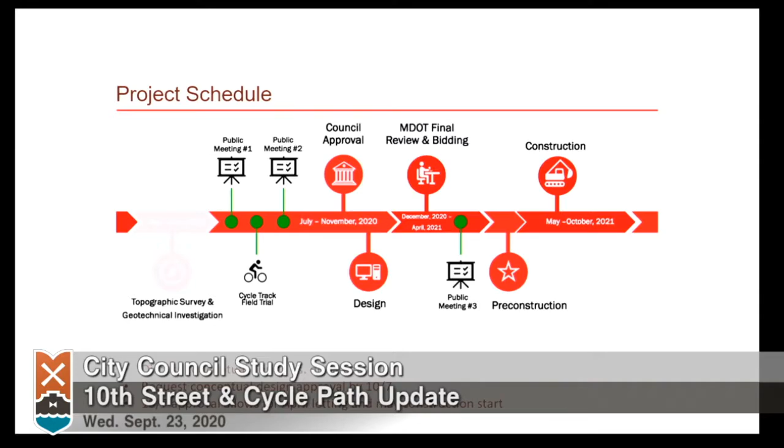So the timeline is basically self-explanatory, but one of the big things we are faced with is that there's some funding on this project, federal funding through MDOT, and the time it takes to get through the review process and the bidding process with MDOT is several months long. That's why we find ourselves here, not quite to the fall, or just getting into the fall, the year prior to construction, really having to set a date out there to try and at least get what I'll call the conceptual design done.

There's a difference between conceptual design and detailed design. So basically, if we can address the conceptual design—that's more the 50,000 foot view, what kind of elements do we want to have in the project—then what we can do over the course of the next several weeks is move ahead with the detailed design that basically puts all the nuts and bolts on that, gets all the pay items.

There's probably going to be 300 some odd pay items with various quantities. So again, we want to, by October 7, get that conceptual design down so that we can move ahead with the detailed design, go ahead and bid that out over the course of the winter, have a bid opening in April, and then still be on schedule for construction in May, after tulip time, after Hope College gets out of their classes in the spring.

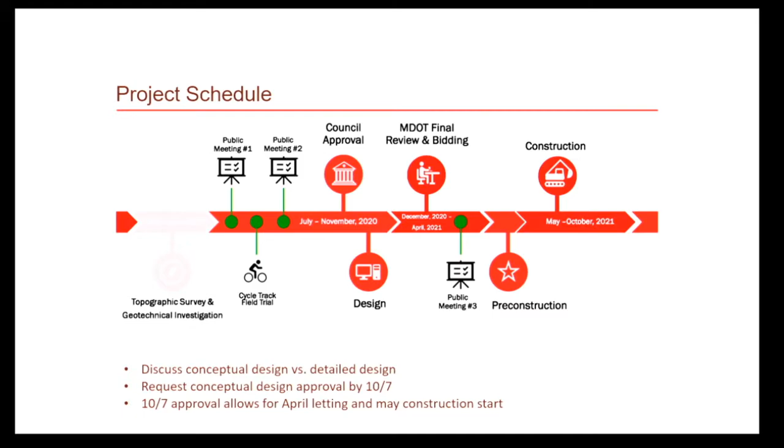So the next slide here just talks about the project limits. Again, it's primarily 10th Street from Van Raalte to Lincoln, a little under 2 miles. The pieces on College Avenue and Columbia Avenue are important, but somewhat ancillary to the overall project. With the construction we've done in the past, it just kind of links everything up nice and together, so we did want to include a couple of those stubs on the side streets to make that happen.

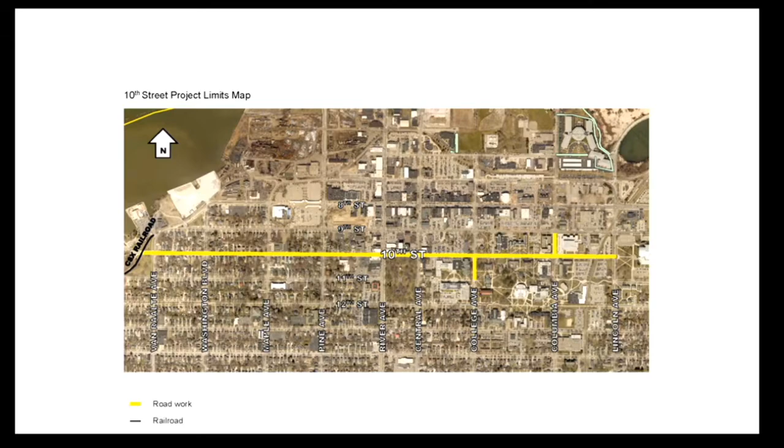So now just going through the design elements here, and this is typical of most reconstruct projects. We're talking about utilities, sanitary sewer. There's some elements of sanitary sewer that are fairly new and in pretty good shape, primarily at the west end, so that west end construction will probably go a little quicker since we don't have that deep utility to replace. But there is some sanitary sewer work, particularly on the east end.

We've talked with the BPW more recently about water main, and they are interested in doing pretty much the whole stretch of water main. There's a few pieces and parts, but looking at the age of the water main and things like that, I think that's kind of brought that up to the surface a little more. So that's certainly the plan at this point to move forward with. And then water services, obviously, that has to do with the lead copper rules and things like that. We don't necessarily need to get into that, but basically we're going to update those services accordingly.

And then storm sewer as well. Again, we don't have any big main storm sewer on this project, but this is basically taking what's probably 100-year-old storm sewer throughout most of it and just upgrading that—smaller diameter stuff, but still important to do. The pavement, certainly looking at new pavement, new curb and gutters. We want to retain the element of on-street parking, certainly upgrade pedestrian facilities where appropriate, and certainly take a good hard look at bike facilities. There's options there that we'll talk about further. Trees, street trees—we'll talk about those more in detail as well, but that's an important aspect of the project.

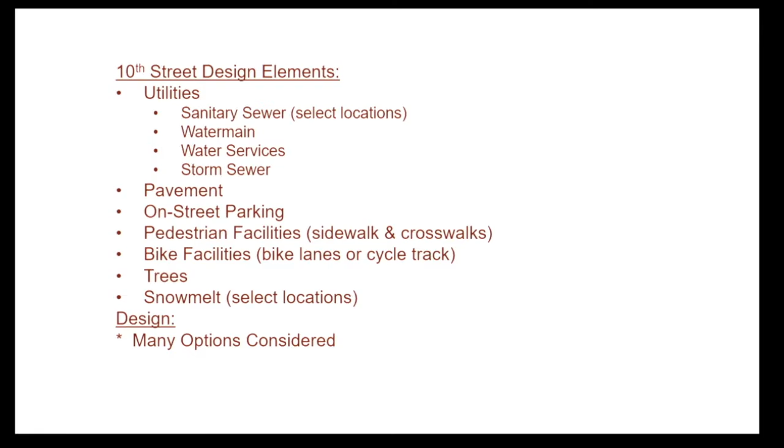And then snow melt. I do have a slide here on snow melt that I'll share with you. Again, snow melt, I think we're going to be working on that probably through October, but we've got at least a baseline for snow melt that we'd like to start out with. So in essence, we've got many different design options that we've considered, including various degrees of those pieces and parts.

Getting back to the snow melt, basically at this point—I appreciate the slide doesn't do much in terms of showing where we're at, but I'll describe it. That circle there is basically 10th Street between River and Central, so Centennial Park is to the south there, and that's basically our baseline for snow melt. When we talk about that, we're really not talking about snow melting the road as much as we're talking about snow melting the sidewalks there. There are some elements that are already snow melted, so we're going to be linking that all up together. That's the baseline snow melt at this point.

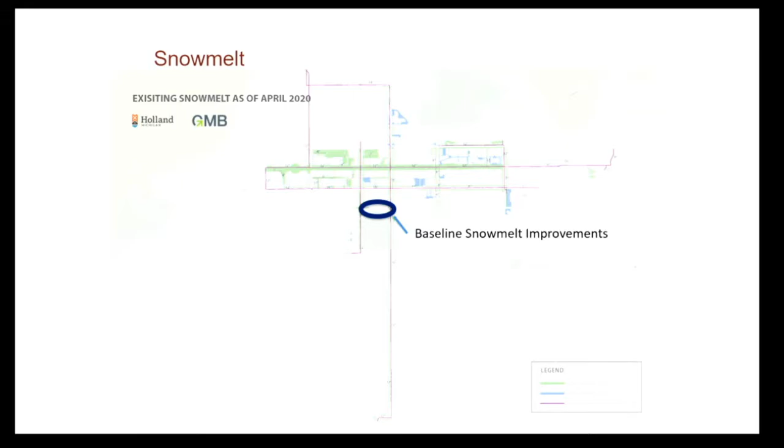Okay, so some project background, and again, all this kind of funnels into our recommendation at the end. But basically, why are we doing 10th Street? Well, 10th Street's on our capital project list, it has been for several years. There's some MDOT requirements, and we've talked with MDOT on a few different occasions about what we can and can't do on the project, so that's good ingredients to have in the mix.

We've got Hope College representation on the design team, which is great—definitely want to put a plug out to Hope. We did that with 9th Street and some other projects that involve Hope College, and it's just great to have them as part of the team. So we do expect some input from them before the meeting on October 7, and we'll share that with everyone.

There's certainly elements, particularly when we start talking about non-motorized, to the city energy plan and goals. We've got a downtown traffic study that was recently completed that identified some non-motorized recommendations along 10th. We have a bike and pedestrian plan that's a little older, probably pushing 10 years now, that also recommended non-motorized on 10th Street. And then we have just connectivity.

This gets to what an east-west corridor would look like, and what it could potentially connect up. So there's a map here I want to show you, but you start talking about all the different things that can get connected.

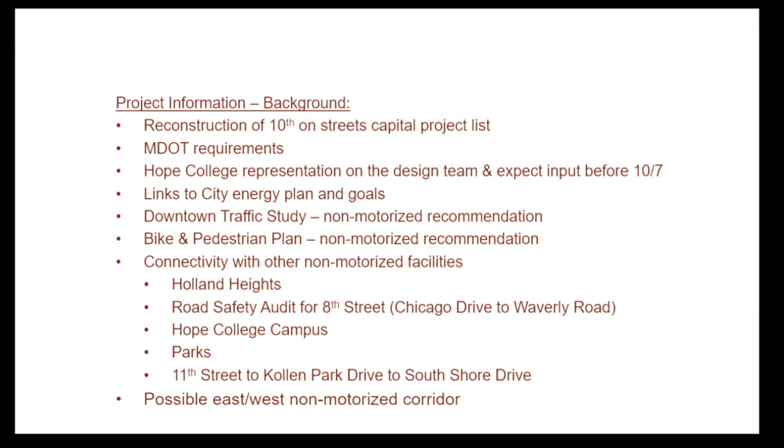Sorry to interrupt, but I'm just going to jump in because I think a lot of people forget that, and I want to make it crystal clear: the 8th Street section from Chicago Drive to Waverly Road is not in the city. That's referred to as the federal district, and that's in Holland Township. You said it, but I really wanted to make a very clear point of that.

And then our project gets you over to Lincoln Avenue, and again, as we talked about through that federal district between Chicago Drive and Waverly, there's certainly a possibility or potential for some non-motorized there too. So you can see how that starts connecting up, and that's why we're looking at 10th Street and giving it a good look for non-motorized, and that's why it popped up on all those studies too.

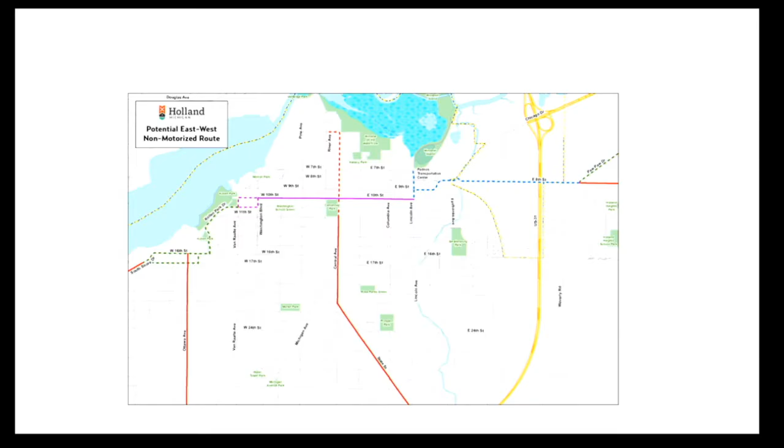Okay, again, some background information for the project. You all recall PASER ratings, 1 to 10, 10 being a great brand new street, 1 being really bad. We're in the poor category for 10th Street primarily overall, so it's due.

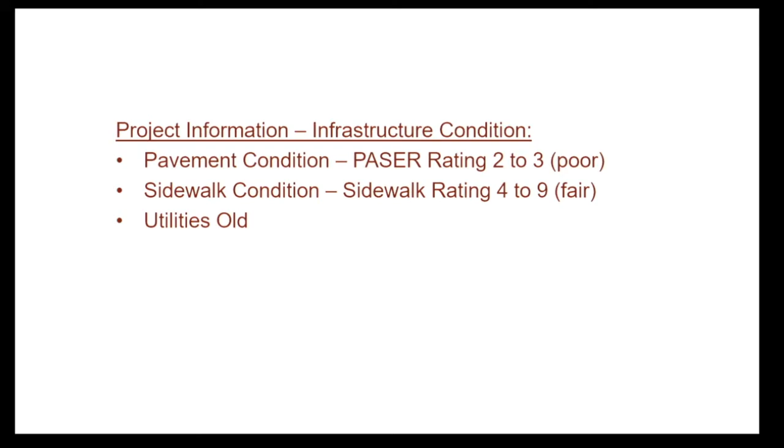Sidewalk condition, I love to give this plug because we just got done with sidewalk rating. I'd say we're in fair condition depending on where we're at. We do have some nice areas of sidewalk, but there are some that aren't in the best shape. So obviously that's part of the detailed design where we'll go in and make sure we get everything in good shape sidewalk-wise.

And then as I mentioned before, with the storm sewer and some of those other utilities, they're just old—we're talking 100+ years here. It's a great opportunity, again, with the funding and things like that, just to look at everything.

Speaking of the funding, we did get an award for 1.2 million in STP, Surface Transportation Funds, through a federal grant. That was through the MAC, the MACATAWA Area Coordinating Council, that's our local MPO. The question has come up in the past, and I want to address it right here: the non-motorized element isn't necessarily required to secure or maintain that funding. So we could move ahead with the project without any non-motorized and not be in jeopardy of losing that grant funding. We did clear that with the MAC, with the MPO, and that was the response.

I will say that part of our grant application included the notion that we would put some sort of non-motorized improvements in there. That gave more weighting to our application, and I think it made it more competitive amongst our peers in the local metropolitan planning organization. So to proceed without any non-motorized improvement, I think we lose some credibility, maybe some street credit amongst our peers if we don't move forward with that element in some shape or form. So with that, we'll move on.

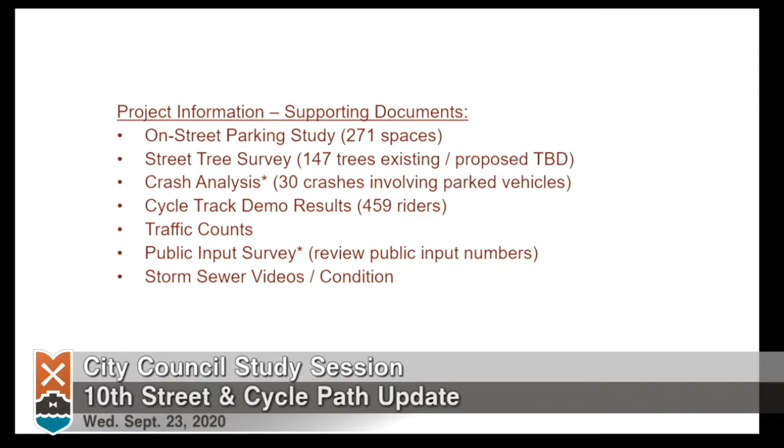Public input survey - I wanted to throw out some numbers, and I'll be quick about it. We had about 200 total folks share their thoughts about the project. Non-city residents: 24 for and 7 against. These can be made available, so don't feel you have to jot any of this down. City residents: 57 for, 16 against. 10th Street residents: 3 for, 29 against. Hope College staff: 18 for, 25 against. Hope College students: 11 for, 9 against. Again, this can be made available should folks want to look at that.

The other thing we've done and are in the process of doing is getting our sewer camera into our infrastructure. Granted, a lot of it's going to be replaced, but what we're looking for there is any kind of blind taps from folks' sump pumps and things like that. This all goes into what we want to do with the cross sections and the proposal here.

Are those videos going to be available for us too, Brian? I'm going to hold off on the videos. Okay, I just want to clarify that. Right, trust me, they're not real exciting.

So, cutting to the chase here, the cross sections considered. These are the six different sections that we looked at. I've got a pictorial for each one, along with some bullet points. We'll go through process of elimination, ticking down the list. The widths really play in, and those play into tree impacts and things like that. That's really the variation we're seeing as we tick down the list.

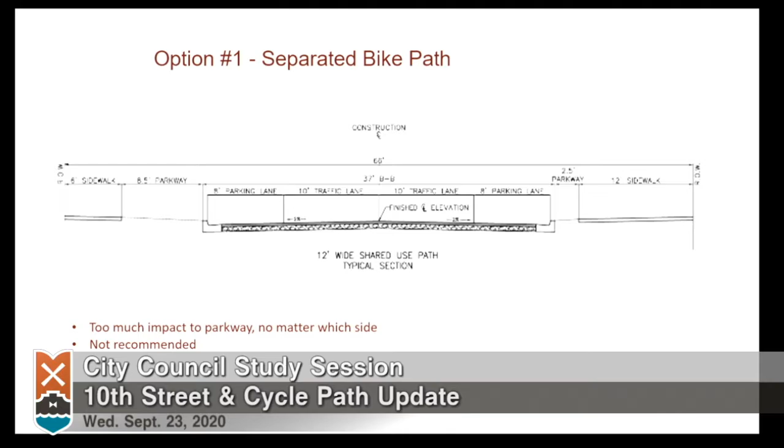So the first option is basically a separated path. I'd like to take a quick minute to document and make sure everyone's clear on the language and terminology here. The sidewalk is nearest the right-of-way. These are the right-of-way lines, and this is a slice of the street and right-of-way as a whole. You've got pedestrian improvements on the outside edges, then what we refer to as a parkway - the grass between the sidewalk and the curb. Then the street curbs, and within that, the pavement.

So what we're trying to demonstrate here, which you see a lot on the north side, is what they refer to as a separated bike path or multi-use path. It's typically a wider piece of infrastructure, 10 to 12 feet in width. For our given conditions, with our parkways already mature with trees, we really think this option is not feasible, because whichever side you put it on, you're left with a very minimal parkway, and basically everything gets affected. So we really don't think this separated bike path is an option on either side.

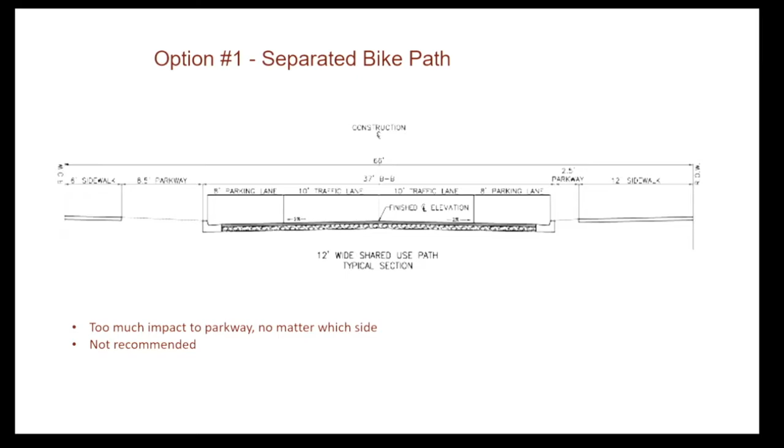So we're not recommending that. A lot of folks are familiar with it, a lot of folks see it, but given our existing setup and what we have currently in the parkway, we really don't think it's appropriate to move forward with that. So the second one we looked at was basically traffic lanes,

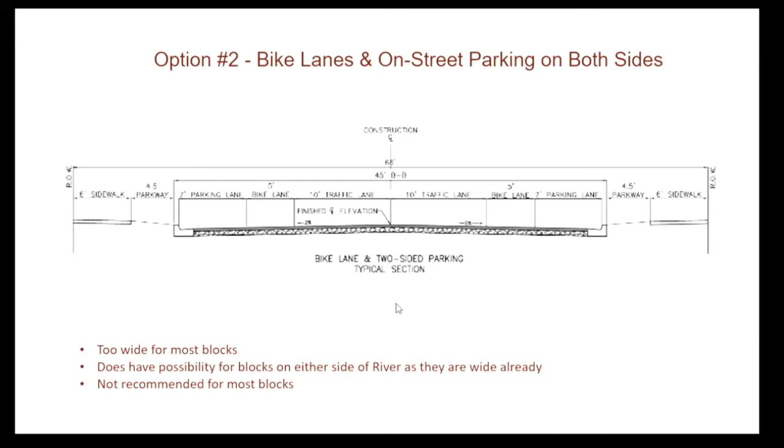parking on both sides, and a bike lane on both sides. We think this is really too wide for most blocks, again getting into tree impacts and things like that. However, there's a couple of blocks - between Pine and River, and between River and Central - that are already wide, and we think this would be appropriate without too many additional impacts, putting the whole kettle of fish into the cross section. Not recommended for most blocks, but we could put that in next to River Avenue with minimal impacts. Okay, we'll keep going here.

The other thing that factors into this is the desire to do the utility work and replace those old utilities - the curb and gutters are going to be coming out regardless of the cross-section we decide to move forward with. That lends itself to the opportunity for us to look at changing the cross-section, even if just a little bit, to address something like this crash pattern. More to it as we go through these sections, but the utility work plays into it because of the proximity of that utility to the existing curb - you can't install that new utility without getting into the curb.

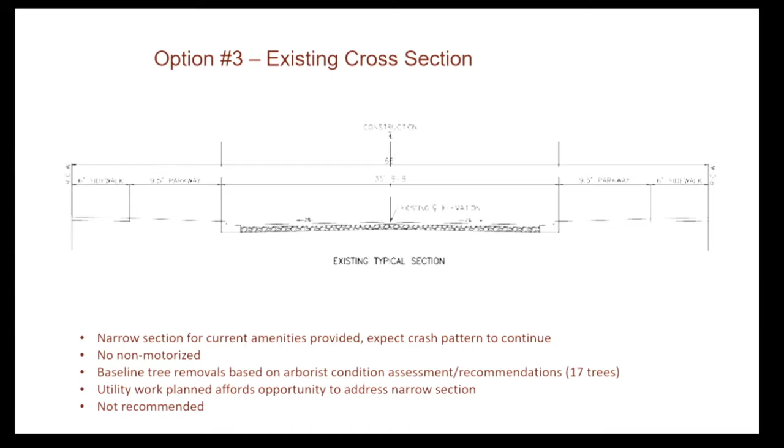I forgot to address this, but with the existing cross-section, and this comes from the arborist report, there are 17 trees, actually I believe that number is revised to 18, since we were looking at this just today. There are 18 trees that have been flagged by the arborist as needing removal or in poor condition.

So we would recommend that those go regardless of whichever cross-section we decide to go with. Just want to make that clear that that's coming from the arborist, not necessarily from staff here. But those address things like a diseased tree, or maybe there's a safety issue with a hollowed out trunk. I saw that on a couple of the notes there. Just wanted to make sure we're clear on that.

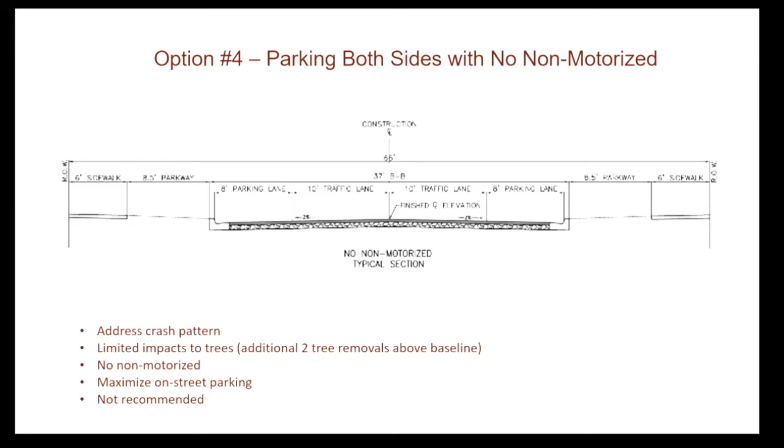So this option, getting back to this, basically 2 trees beyond the 18, so a total of 20 tree removals. No non-motorized. It definitely maximizes the street parking, but we're not recommending that, primarily because of the lack of the non-motorized element. The 5th option we looked at is what we demoed with the cycle track.

Do you think it would address the crash pattern? It definitely involves more impacts to trees, and I know that's a big number, but 102 tree removals out of the 147, and that's above baseline. So basically, there's a lot of tree impacts with that cycle track option.

And again, it gets into the dimension there, 41 feet, that really starts picking up all those trees. The heartbreaking thing about this is that you've got this non-motorized feature that definitely appeals to all facets of users there with the bikes. And I saw it, I was out there riding it, and it was great to see. I just don't, it's hard to recommend that with that kind of impact to the trees.

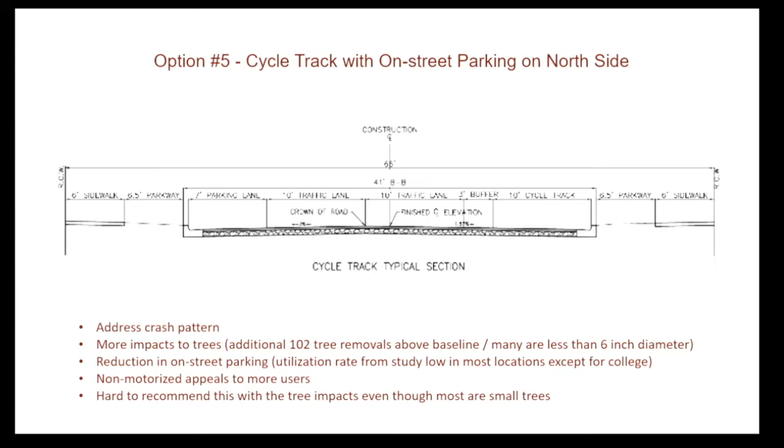And so that really is, in essence, what led us to the final option. What we're going to recommend is basically going with the bike lanes, maintaining on-street parking on one side. Again, we think we can get to the crash pattern and improve that, with limited impacts to the trees. There are 18 additional tree removals above the baseline of 18, however only 2 of those trees are greater than 6-inch diameter.

So these are really smaller trees, and I'll share with you where they're at: in front of First United Methodist Church, where we want to go a little bit wider with the cross section and have parking on both sides, and also at the school at the Hope College campus on the east end between Lincoln and Columbia. That's where most of those 18 trees would be impacted.

There's definitely a reduction in on-street parking because we're proposing to eliminate it on one side in specific blocks. That amounts to approximately 99 spaces. I think that's probably a little on the heavy side. But the thing I'd like to point out is from the utilization rate, when we did the traffic study, similar to what we did with Central Avenue which has the same cross-section, we looked at the utilization, how much this parking is really being used at any given day, at any given time.

And particularly at the west end, we found the utilization rate to be on the low side. Obviously in the campus it's a little bit higher, but I do believe that there are additional parking facilities on the campus that may not be fully utilized.

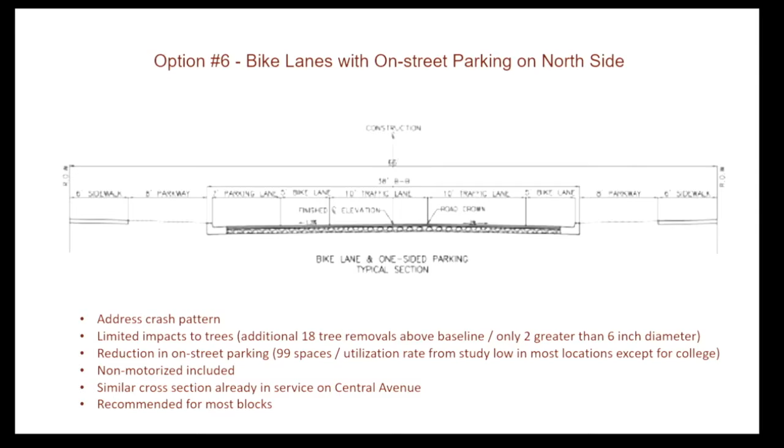So to get to the ultimate slide here, option number 6 is basically the bike lanes with the parking on one side. And option number 2 on either side of River Avenue is basically the bike lanes with the parking on both sides. So the bike lane is continuous throughout, and then we're trying to maximize the parking where we can and where it makes the most sense.

One thing that I'll point out, and I guess ask for your continued grace on this, is at the west end, that last block between Van Raalte and Washington, we're still looking at that. I think everyone can appreciate the geometry there at 10th Street and Van Raalte is not good for a crossing. And so we want to look at different options there, but also look at maybe different locations as well, where we want to try and encourage folks to make that crossing on Van Raalte.

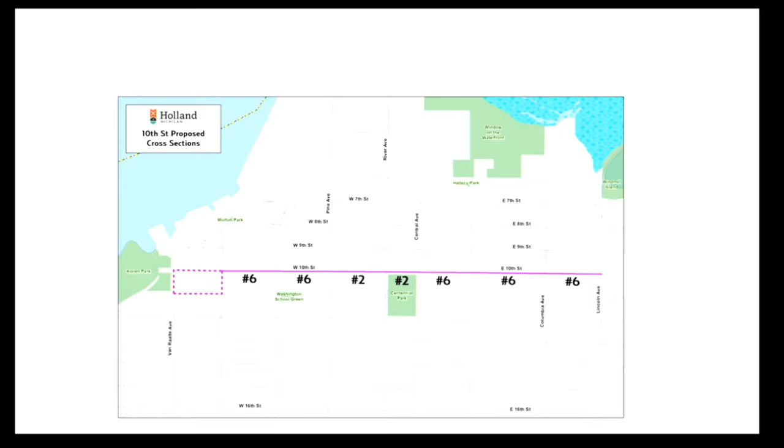And I don't think, from a conceptual standpoint, we necessarily need to have that nailed down at this point. In fact, given there's probably only a couple of different options we would go with there, that's something that we could even delay until quite late in the process. But I do think it deserves some additional thought, which we hope to have in the future, and certainly want to flesh out all possibilities there. So that's basically it in a nutshell on 10th Street, and I'm happy to answer any questions or comments.

Questions? Yeah, Quincy.

So I wanted to ask about some crash analysis. You said, and kind of ask what Nikki was asking as well, 30 parked cars, correct? Correct. You alluded to this a little bit. The time frame, is that the 5 years you were talking about? Yes. So when we did the crash study, we looked back at 5 years worth of crash data.

Now that crash data, we don't have any crash data for 2020, right? It comes to us on a yearly basis. So this is basically 15 to 19, those 5 years, right? 15, 16, yeah, those 5 years. Okay.

I know you said you don't have the data behind that, but what about the dominant time frame? Like morning, evenings, or what would the time frame be? So our traffic engineer did not flag anything, which tells me that there probably isn't a trend there, but that's something that we can look at.

What that does is that requires us to go into the individual UD10s, the reports themselves, and just document that. And there was a fair amount, I think there was 57 total crashes here. 53 actually, sorry, 53 crashes, 57% of those involved parked vehicles. So, but we can get some more detail on time of day, just so that we have that.

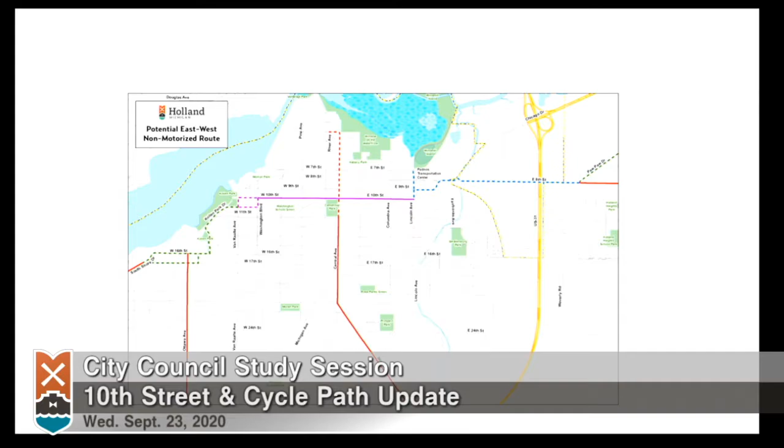And again, that's where, you know, that cross-section, if you go anywhere south of 12th on Central, you'll see that cross-section. The red line right down the middle. Yeah, that's Central. There we go, okay, Central. I wasn't seeing it, I thought that was River and Washington, so thank you. Got it, Central, yep.

What we didn't put in there either, Brian, maybe in a future version we can put in there, we also have the Macatawa Greenway. I don't think that's overlaid on this. Some of it's represented, but at Lincoln, isn't it where it actually goes south and then goes across? I think it'd be good for us to add that, as well as the US bike route. I think we can fill this map in a little bit more too.

And I guess last, we talked about 30 accidents over the last 5 years, correct? I heard you correctly. Yep, in that, 3 bicycle accidents. Two, two bicycle accidents in 5 years.

Bicycles have this unique access that cars don't. They can ride on sidewalks, they can ride on the road, they can ride on streets. They don't even have to be licensed or insured, but they can go just about anywhere, they can ride through the grass. So I'm just wondering what problem we're trying to solve. People ride on that, they're looking at 6 blocks here in the city of Holland, but they gotta get here somehow with that bike, so they're gonna be riding down some very busy streets and roads, and they do it anyways with due caution, wear helmets, they obey traffic laws. So I'm just trying to figure out what we're trying to accomplish with this.

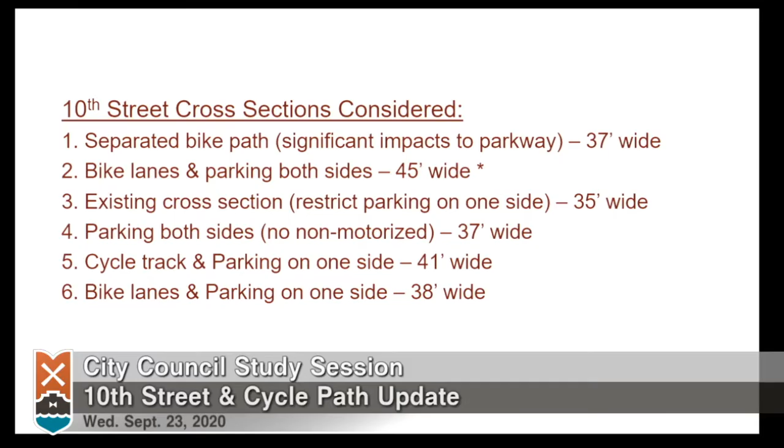Okay. And then you mentioned that the additional 18, above the ones that will need to be removed, are down in front of FUMC and Hope College? Yes. And the other ones then I assume are west of Maple? Yes, I think there's 2, maybe 1, west of Maple.

So the 36, again, when I look at this, I divide that 36 into the 18 that the arborist said no matter what - those are sprinkled throughout. But out of the 18 that are cross-section related, I think all but 2 are in those 2 areas by the church and by the college. I kind of wanted to get a sense of where, when you're saying sprinkled throughout - it would be really nice to know exactly where. I don't know if you can map that out, but it would be nice to know.

You bet. Anyone else? Yeah, I've got just a couple of comments to make. First, I really appreciate this group, because to echo what some of the other council members have said, the comments that have been made here are ones that have been bouncing around in my head in regard to this, and I'm really glad that we've got 2 weeks to be thinking about this before we're going to be asked to make a decision on it. I do want to congratulate you, Brian, on the hard work that you and your team have done on this, and also in including Hope College in this process.

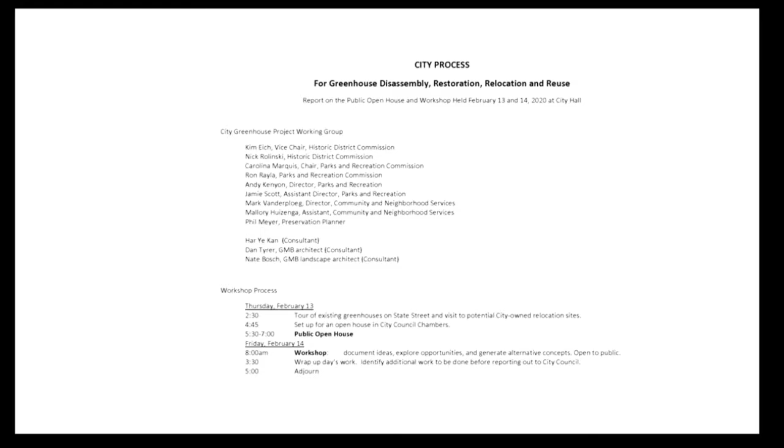We covered a lot of ground with that group. We went through a process that probably identified 8 to 10 different sites by the time we left that evening session. Then during the course of the next day, we narrowed that down to 6. Those included Centennial Park, Window on the Waterfront, Windmill Island, Civic Center, Van Raalte Farm, and Kollen Park. Some of those parks had multiple locations.

That was the 6 we then spent more time talking about and exploring with the team. We ended up with the top 3 candidates that we thought made the most sense, and they vary quite a bit in terms of what each one offers. Those would be Centennial Park, Civic Center, and Window on the Waterfront.

Now I've brought my favorite 75 slides here to share with you on these. Thank you for narrowing it down to those favorites. Yeah, I was going to say, Phil, if you say that, you may not visit this group again anytime soon. Just kidding. 80 slides?

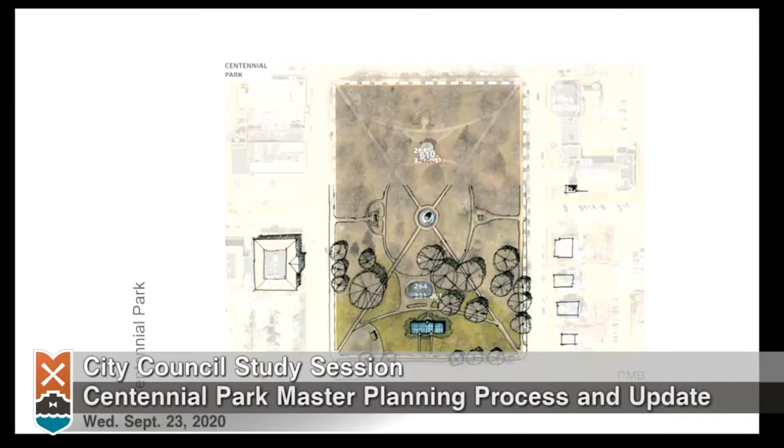Centennial Park really rose to the top for a variety of reasons. I think it was the preferred park from the Parks Department perspective. It has the most direct historical link to the greenhouses, which were built in order to service Centennial Park at the Centennial, or just after.

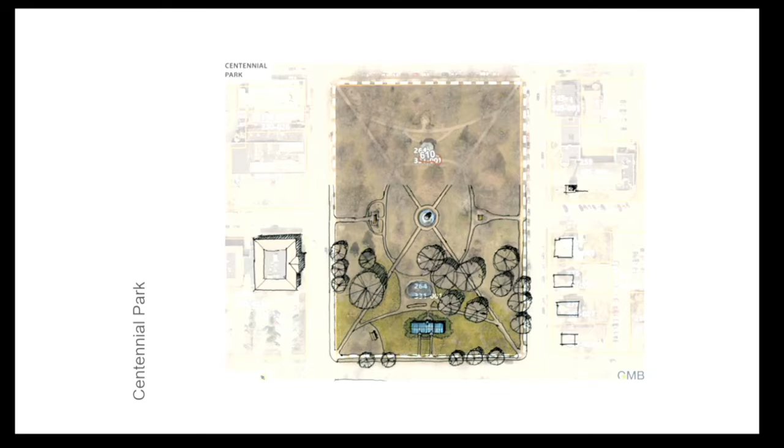There were two locations in the park that were identified. This is on the south end of the park, City Hall's on the left-hand side in this slide. So there was a location at the south end of the park that could look something like that, where a portion of the greenhouses could go.

Remember that there are multiple buildings with the greenhouses. The Tropical House is the most architecturally interesting, although it's not the original greenhouse, and then there are other pieces of greenhouse there as well. So the question the group explored is where can these land, either entirely or some portion. In Centennial Park, because of the size of the greenhouses, this location on the south end, on this slide City Hall's on the left, was one location. An alternative location is between the Van Raalte statue and the fountain in the center.

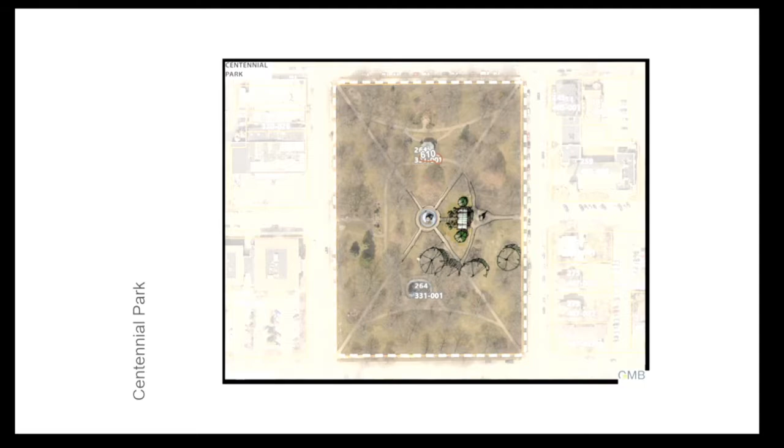And this is what it could look like. It's a little hard to see, but on the left of the fountain there is a footprint of a building. These were all done to scale, so we've got a relative idea that these would fit in some way. So those were for Centennial Park.

We also looked at the Civic Center and the potential there. We initially looked at within that south portion of the parking lot as maybe adding some greenhouses that could provide covered space for market activities or other activities associated with the marketplace itself. Ended up in the northwest corner with two of the supporting greenhouses, not the Tropical House necessarily, but two of those that could provide some supporting space for the farmers market, but also in the winter.

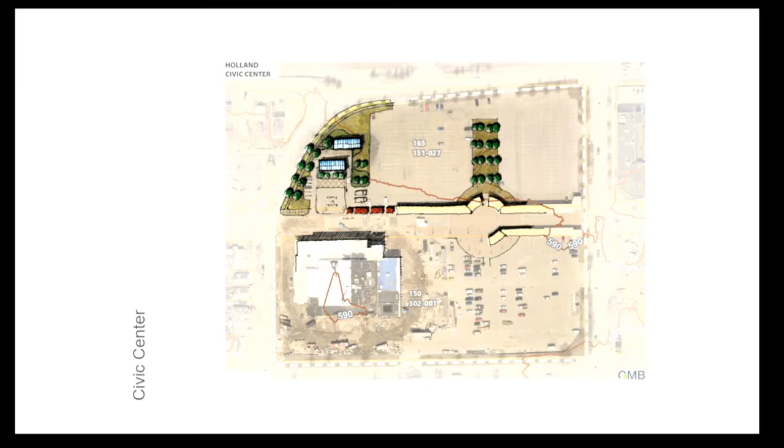That diagram maybe shows it a little better. The area out in front of those buildings, between the Civic Center itself and those greenhouses, might be an ice skating area, or the concept of ice there, so those buildings could be warming areas for the skating. Multiple purpose and multiple opportunities there. Again, this concept doesn't utilize the Tropical House.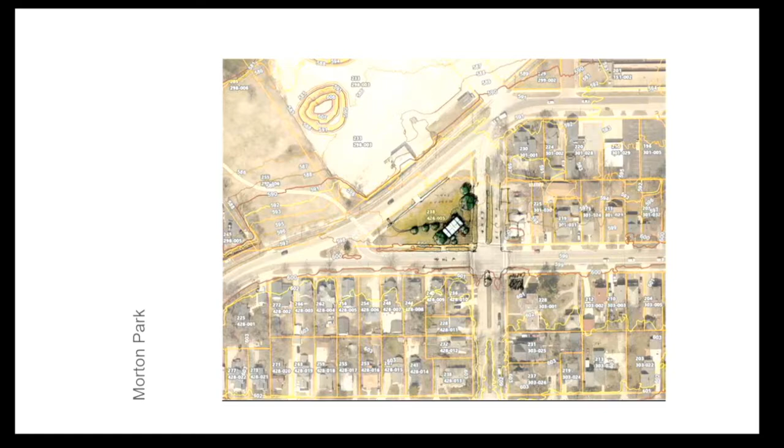And that could look something like this, with that greenhouse addressing the intersection of Washington and 9th Street.

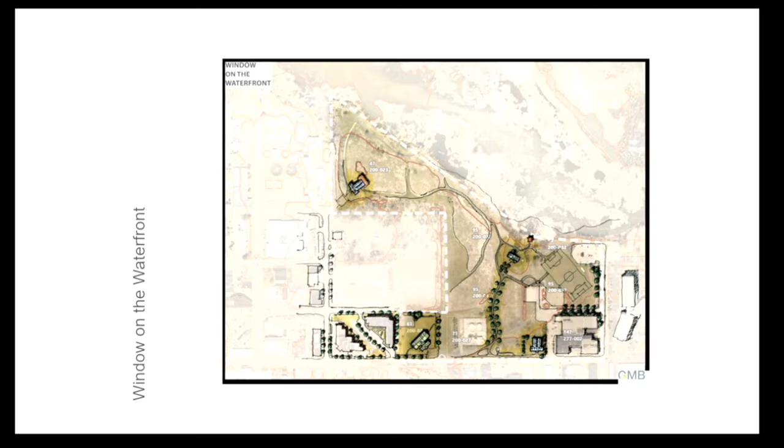Then there was Window on the Waterfront, and this is one of those sites where there were multiple locations identified. I'll just run through those, but you can tell where it's colored up. There's a sort of alternative sites, and each would sort of host an alternative program if you were to look at one of those possibilities.

So the first option is at the foot of College Avenue and 6th Street. It would be locating some portion of the structure. It could be as small as the Tropical House, or some portion of the Tropical House, or it could be the beginning of something that could grow much larger, more like a greenhouse conservatory type of opportunity there.

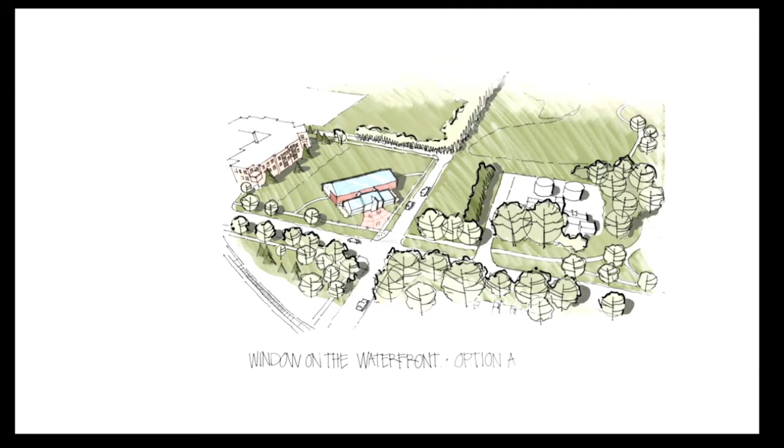That creates an opportunity most accessible sort of directly into downtown along College Avenue. Another alternative is further east on 6th Street.

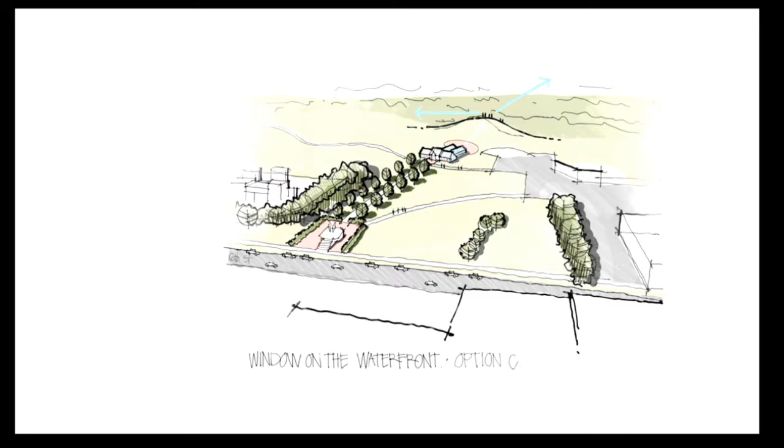The peaking unit is on the left, and the sculpture is next to that. In that gap between that and other development is the possibility of bringing a facility like this to that location. A third location would be out beyond that sculpture. There's a walkway that takes you out into that area, utilizing the area just below the rise as a location for the sculpture or the greenhouse, which opens up the whole area for that greenhouse.

And then the fourth option within the park is over on Central Avenue, as Central Avenue turns and heads over to River Avenue at the end, with a sewage treatment plant up on the left. There's an opportunity maybe to energize some of the waterfront plans talked about, an east-west connection along there. If that east-west pedestrian connection came along this street, it might give you an entree into Window on the Waterfront from that end.

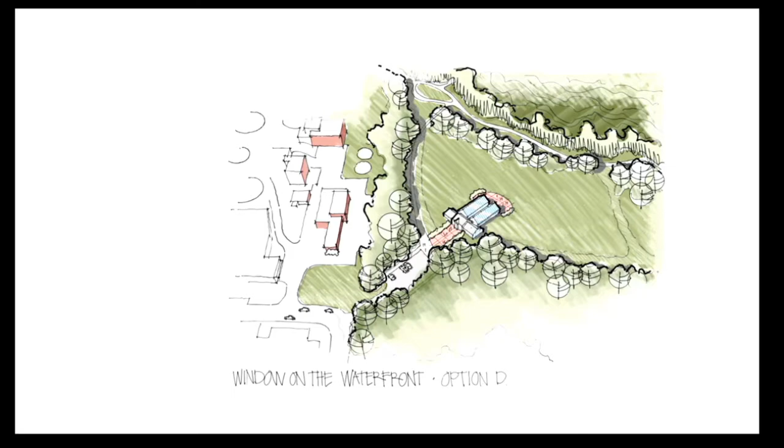The uses in all of these cases would most likely be garden related, but could also be gathering spaces and more active kinds of uses. I think that's it.

So there were multiple concepts for this. The focus really, as we talked about it with both the Historic District Commission and the Parks and Recreation Commission, as Andy mentioned, we got together, and the consensus from both of those groups is let's focus first on Centennial. In order to focus on Centennial, there needs to be a vision and management plan for the park before we can decide whether this is an element that should fit into that. So that's the request we're talking about here.

The focus is on that. Meanwhile, keep an eye on what's happening with Window on the Waterfront. There are so many unknowns in that area in terms of development opportunities, both public and private pieces to that. There were a lot of ideas thrown out in the visioning process for the waterfront, a lot of great ideas, and in fact there were places for greenhouses within that context. But at this point, we didn't think the greenhouse is probably the leader in those decisions. It may work well with another proposal that comes along, but timing is important to move this along in terms of the longevity of the existing greenhouses. So the focus really has been on Centennial Park as we're trying to move forward here.

Thanks, Phil. Questions from council? Dave?

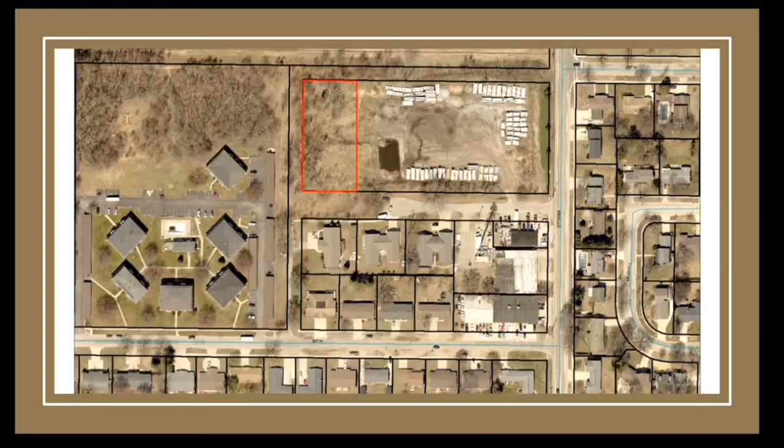Is this zoned -- bad choice of words, sorry. This is Homestead, right? Yes. Okay, so you're just extending the cul-de-sac to the west then? Well, there are a couple options that we can work through and come back to you with a recommendation once we get to that point.

Really, the intent tonight is, would you even consider this? Because on all of these, Mike, I'm not going to have all the questions answered tonight. We're just not -- clearly not, I know. I've been around here for a number of years, you should anticipate that.

We don't want to invest the time and quite frankly the money at this point if the council says that's really not anything we're interested in doing. So really, that's the intent tonight.

It's fun to see the aerial view. Other questions that Matt can't answer? Is this zoned residential or commercial? I believe this is zoned residential. Okay, but we can verify that again as we go through this process.

Matt, as soon as you said that little rise there is made up of street sweepings, environmental flags went off in my head. So we'll address all of this. The property that we sold in Holland Township was the former HPD shooting range, so I'm not very concerned at this point that we can't work through any issues that might arise.

It's all organic. Maybe I shouldn't bring this up, I've talked a lot tonight. I apologize if I've talked too much. We're still right on track with time, so don't worry about it.

We made a conscious effort, when we had surplus property on 36th Street, to solicit ideas for that property. Would we do something similar to this, or is that premature to even ask that question?

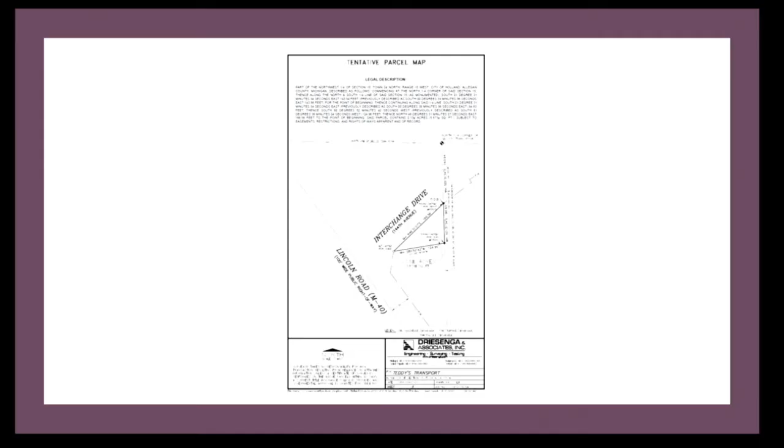Some of the due diligence we've done to date is that parcel is only 5,800 square feet in commercial zoning, so there's really no value to anyone else except that adjacent property owner, and no real value to us as the city. We actually did go through the process, and Teddy's, at their own expense, staked out this tentative parcel map. Brian and I were both able to go down and take a look at it.

Let me take one step back. Within that property review committee plan, there were a number of properties identified as really having no use except to the adjacent landowner. This one very clearly seems to fall in that description. Nobody can build on this parcel, it's just far too small, probably not much bigger than this room, so there's really nothing that can go on down there.

So this is one we would likely have an appraisal done, either internally by our own appraisers or by a professional appraiser outside of our organization, negotiate a price, and come back to you with a purchase offer. Since it's of no value to anyone but the adjacent property owner, we'll see how the appraisal comes out, but it may not have as much value as we would hope.

But it does clean up a couple things, cleans up our right-of-way and cleans up their property. I'd be curious to see the comps on that. And to be clear, Matt, this would not be a bid situation. No, we would enter into a negotiation on the city's behalf with that property owner and come back with a negotiated purchase price because, again, it's basically of no value to anyone else. That's the view, just in case this is Interchange Drive.

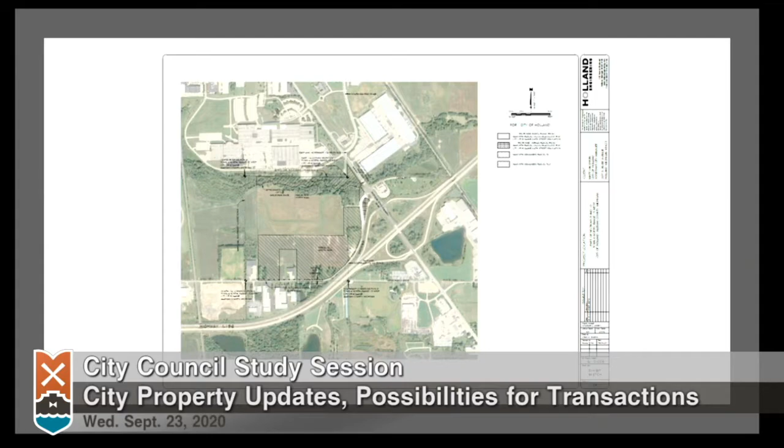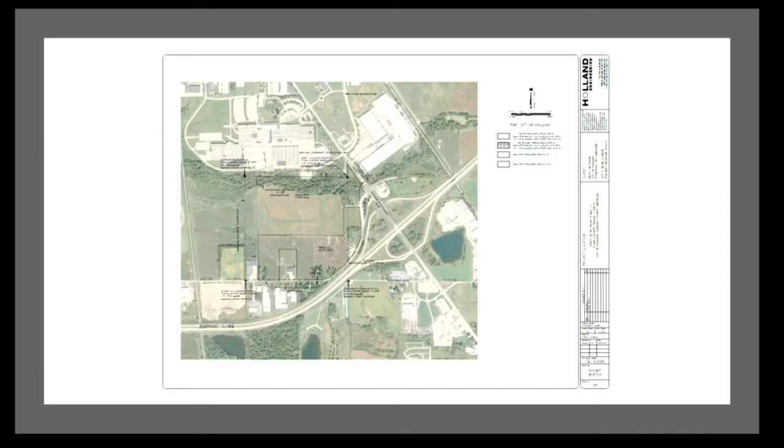All right, the next one is actually on the other side of the highway interchange. When we realigned 64th Street to come in alignment with Cabill Drive, there was a large purchase of property to allow that to happen. That left an orphaned parcel that you can see a little bit clearer in this piece—the contextual photo, and then coming in a little bit closer.

We've had a number of contacts about this piece of property over the last several months to several years. It's about an acre plus or minus, and it does appear to be buildable. It does have utilities in it, which we know will be an issue—those may have to be relocated. We went through and talked to the drain commissioners about this as well on both these properties, and they're good with it. This property probably has some value. In addition to our property, there appears to be some additional MDOT surplus property immediately to the south. If someone wanted to pursue that with MDOT, they could, though I would not envy them if they chose to go in that direction.

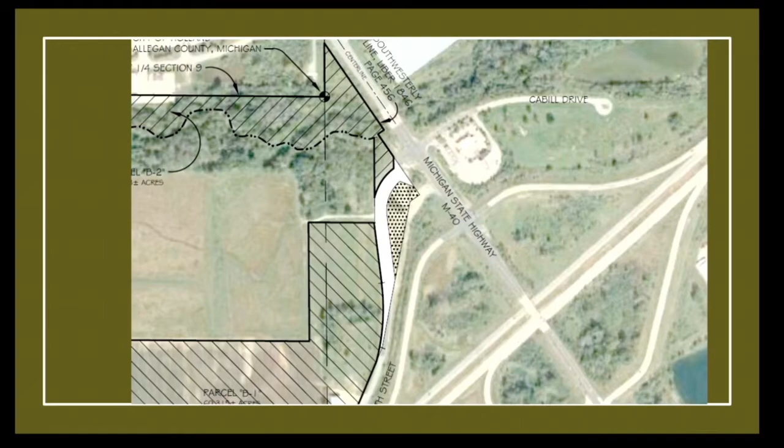For this property, we've gone to the point of having Holland Engineering actually do the layout. This is very confusing in this area because of that highway interchange. We know the parcel will have some issues because of those utilities that we'll need to work through with a potential buyer. But this is one that if you were to choose to list this or declare this property as surplus, we would likely list it with a realtor or recommend that we do so because we have some more value here, and the open market may bear more fruit than anything that we might do.

I see Mike kind of looking hard at this one. Mike, we would require that their entry and exit be off of 64th Street, not off of M40. If we allowed them to come directly in and out of M40, we'd obviously be creating probably a worse situation than the one we just fixed.

What I was really looking at hard was—I believe just to the north of that, we mitigated some wetland because of that transition, and I'm wondering if push comes to shove, every once in a while we're looking for mitigated wetland type of scenarios, such as Meijer and things like that. I understand there's a lot of value, but this may be a piece of property that could be considered for that because of the topography. Yeah, it's pretty high.

I would think that highway frontage, especially in that corridor, it would make more sense for us to pursue wetland mitigation in other locations. But from a financial standpoint, Matt, I understand that. Yep, but we went through a lot of trouble to clean up that intersection from a safety standpoint.